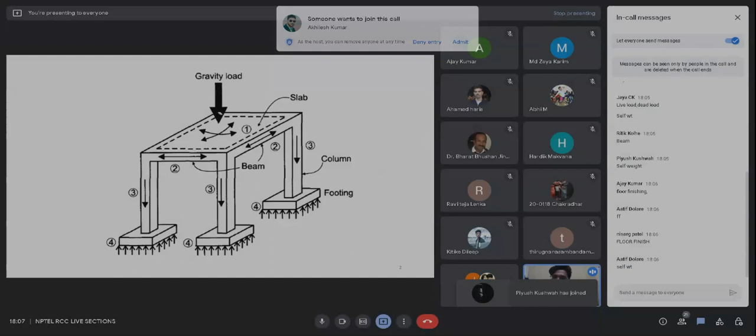The purpose of showing you this diagram is to clear your very basic concept in RCC, that is the slab. What is the first component of a reinforced concrete building that we are supposed to design? The very first component is the slab. After the slab we design the beam, after beam the column, and after column the foundation. I think this is very clear for you now.

So coming to the slab, you all have already answered me that the slab can have two types of loads, dead load and live load. Inside that dead load and live load we can have further classification, which we will see in further slides. Now let's focus on the slab only.

Can you guys answer me in what manner a slab can be designed, for what type of forces or what type of stress resultants the slab is designed? What type of forces are predominant in a slab? Can I get some answers?

Okay, now you. Who was speaking? Vinodha? Sorry, I didn't hear you. Okay, what are you saying? I have just asked a question. Are you replying to that question, or just replying your name? Yes sir, I will give the answer. The answer is live load, dead load. Okay, that's fine, that's fine. So you are saying dead load and live load are acting on it, but I think you all are not very familiar, so it is now my job to make you familiar with this. Thank you for your reply, Vinodha.

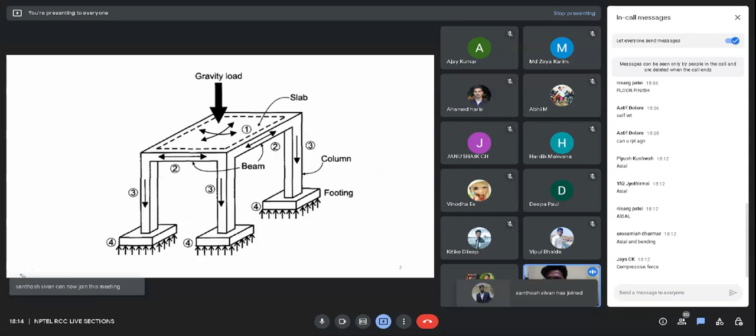So now moving on to our main problem, let's look at it. I have brought a very good problem for you guys. So this is our problem, I hope you all can see it. Don't get scared with this problem, it is a very easy problem, and you can all solve it with your basic knowledge from engineering mechanics.

You only need to convert some line loads into a point load, or some triangular load into a point load. I already told you there are two types of slab, but you are not very familiar with the types of slabs and what type of load distribution we use for different types of slab. So I have already given you the load distribution from the slab, explaining in detail how load from a slab gets transferred into the beams, and from beams into the columns. These problems deal with that explanation only.

Since this is the very first class, I am not using many design terminologies, and I am not using many codal provisions, because at this stage you will all get confused with all those. So I am just solving this problem from a basic mechanics point of view. Now let me read this question for you.

The slab shown in the figure has a thickness of 150 mm, and in addition to its own weight, it supports 0.85 kilonewton per meter square of partition load, and a live load of 2.4 kilonewton is also acting upon it. Transfer the load of the slab to the beam on all four sides in the form of line load. Unit weight of concrete is given, and we are asked to assume the ultimate distributed load on the slab in this manner. Then they are asking us to calculate the maximum bending moment on the beam and the axial loads on the columns. I think this is a very simple problem.

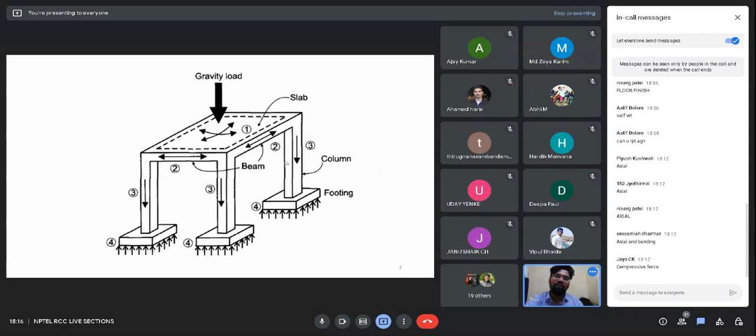Now different types of dead load and live load are given on this frame. They are asking us to transfer this load onto the beam, and then calculate the maximum bending moment on the beam, and find the axial force onto this column. See how many concepts we are getting cleared from this problem. Now we know that firstly we need to transfer the load from the slab to the beam, then from beam to the column, and then finally to the foundation.

Now I want you all to think of how the different types of loads are acting on this slab. I have already given you the load distribution. Let me explain how this load distribution is acting.

Firstly, this is the slab. This is a rectangular slab of 6 by 4 meter, and these are all the beams at the periphery. This is a 6 meter beam, this is a 6 meter beam, this is a 4 meter beam, and this is a 4 meter beam. So we have four beams.

So we need to calculate the maximum bending moment on these four beams based upon the load which is acting on this slab. So I think by now you are getting familiar with what we are trying to solve in this problem. So we are also given some areal loads.

So these loads are with a unit of kilonewton per meter square. Kilonewton is the unit of force, and they are distributed into the area of this slab. So what all types of load do we have? We have a dead load of 0.85 kilonewton per meter square. We have a live load of 2.4 kilonewton per meter square.

Can any one of you tell me, apart from these two loads 0.85 and 2.4, what is the other load which is acting on this slab by reading this question? The question says the slab is of thickness 150 mm,

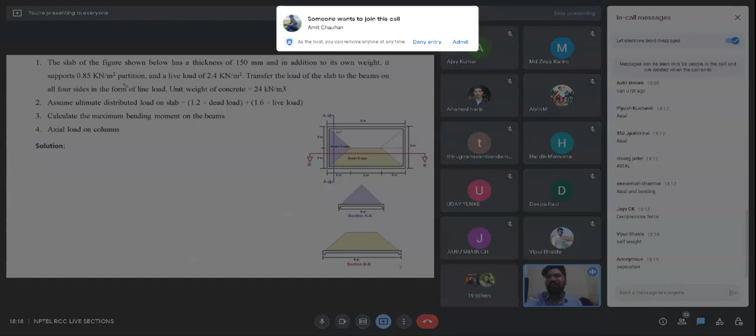Separation, okay. What is this separation made of? Separation means what? Okay, I'm getting what you are trying to say. You are saying, okay, Vipul is saying brick wall. Okay, Sharon is also saying brick wall.

That is very good. So partitions - we have a partition wall in between two rooms. Nowadays we have different types of partition blocks, AAC blocks like autoclaved aerated concrete, or we have fly ash bricks. We have different types of material. So we have this dead load due to this partition, and the live load is coming because of people living in this building or structure.

So apart from these two loads, can anyone think of some other dead load which is acting on this frame or on this slab? Sir, excuse me sir, where is the location of partition involved, sir?

Actually the partition wall, they are basically located upon these slabs, like upon this beam. Okay, this is a very good question. He is saying, where is this partition load acting? Actually, this partition load is basically acting upon these beams. We basically make partition - we make the brick wall upon these beams.

But now in this question, they are not giving us the partition load in the form of a line load. They are giving it in the form of an areal load. So what they are actually trying to say is that this partition load is distributed uniformly upon this slab. Did you get me?

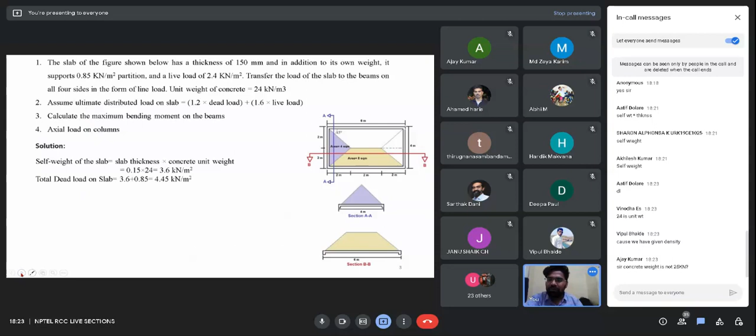So now we have the self weight of the slab as well, and we have the total dead load. We can calculate the ultimate distributed load on the slab. So total dead weight has been calculated, and now we have the ultimate distributed load in this form, which I have already calculated for you. You guys will be getting these notes as well as the recorded video on YouTube.

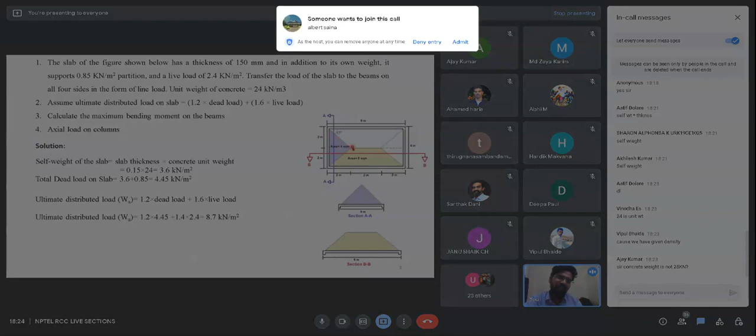Now what is asked in this question is to transfer the load of the slab to the beam. I have already given you the type of distribution. You can see this is the triangular distribution for this beam, this is the trapezoidal distribution for this longitudinal beam, and this is the shorter beam. So can anyone of you tell me how to calculate the total load acting on this beam, or how to transfer this load onto this beam?

Can anyone of you answer me? Believe me, this is going to clear a lot of your concepts. Yes sir, isn't the triangular load formula 1 by 3 WU into L? 1 by 2 WU into L? 1 by 3, 1 by 3.

Okay, very good. Who was this? Shivam, okay so Shivam, you gave a very correct answer. But before going to this formula, that was actually our final answer that I was going to derive and explain to you, but this is very good, you already know this. Can you explain how did you come up with this expression? Why didn't you directly multiply this 8.7 into this triangular area and get the total load?

Sir, actually I had checked in the book. It was given that it was at the center of the triangle, there the load is 1 by 3 WU into L. I think it's the centroid, something related to centroid. Okay, you have checked it in the book, so your answer is very correct.

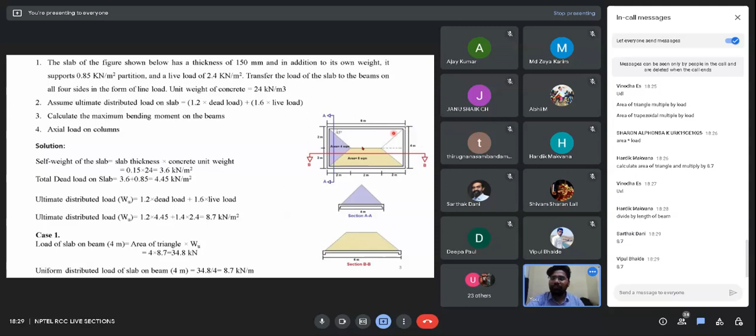On this longer beam, 8 multiplied by 8.7... 69.6. How did you get it? Okay, very good.

Okay, fine. Some of you are getting a different answer, 52.2. I don't know how you got that. So these are the two answers we have. Okay, I think you are saying 11.6 is the UDL. Okay, fine, I get you.

So now we have the line load for both of these beams, and we are proceeding to the design of beams also. We have already calculated the area load on the slab, so we can design the slab now. How to design the slab, we will look into in further sessions of this course.

But for the time being, let's first see how we transfer the load from the slab to the beam. So we have transferred the UDL onto the beam.

Now I think it is very easy to calculate the maximum bending moment from this uniformly distributed load. We have 11.6 kilonewton per meter UDL on this beam, and here also we have a uniform load. Just assume these as simply supported beams, and you all can calculate the maximum bending moment.

Can you all do it? Just reply with yes in the chat box if you can calculate the maximum bending moment with UDL onto these two beams.

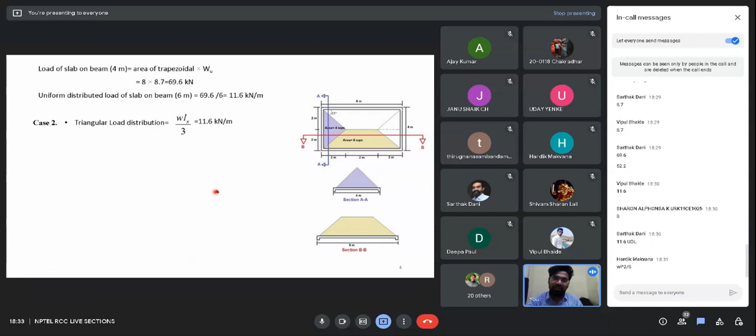This is less as compared to this 11.6. So 11.6 is a more conservative design. Why we are using this formula, I will be explaining you.

First, let's also look at the other one. For the longer beam, we have a somewhat tedious formula, which you can remember or not remember, but you can definitely derive it after I make you understand, where K stands for Ly by Lx. When I substitute the value and calculate the line load onto this longer beam, I am getting a value of 14.88. So this is also higher as compared to 11.6.

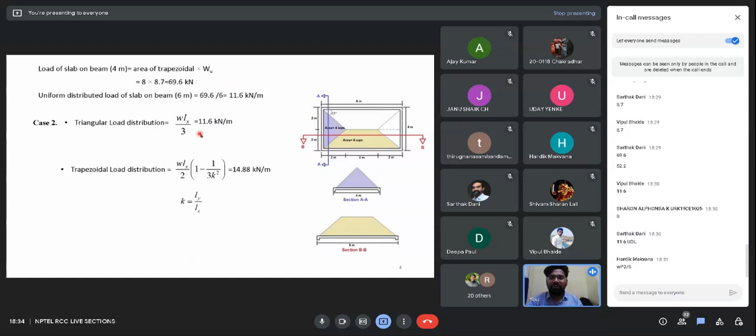So sorry, I said previously that your building will go nowhere if you go by this design, but I think the building will go somewhere, or that will be a not very conservative design. So what do I mean by conservative is you are not taking the maximum load for the design of the structure. So now the question is, why am I using these differently looking formulas?

We want to average out the load on the beam. You want the average of the load on the beam. Okay, that's a fine answer. You are going close to the actual answer. Can anyone else think of a better answer?

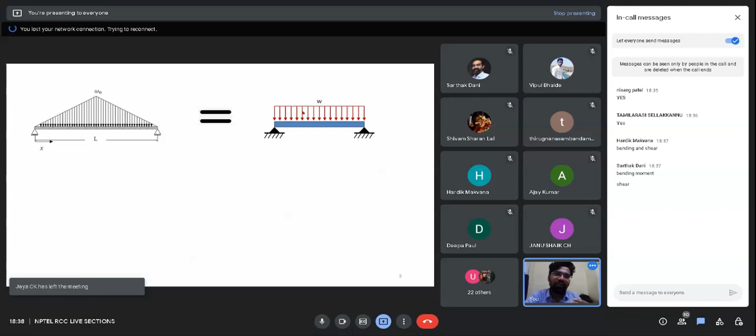Okay, so what we are trying to convert is this triangular areal load into this UDL load. Let's take this first case in which we are converting this triangular areal load into this UDL load. We are interested in finding the maximum bending moment for the beam at the center. So at the center, we will be equating the maximum bending moment at the center of this beam to the maximum bending moment at the center of this beam.

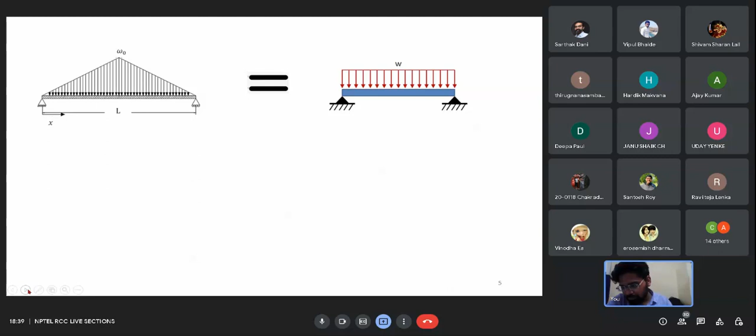So what we will be doing is equating the bending moment of these areal loads. Just remember these are areal loads because a slab always gives areal load, not line load. So this is W0 per meter square, and this is W per meter square. We are converting this triangular areal load into a UDL areal load, or rectangular areal load, whatever you can say.

So can anyone of you tell me what will be the maximum bending moment here? I think it will take some time. Can you just tell me what is the maximum moment for this UDL case, the normal UDL case?

Normal UDL case, that is easy. For a simply supported UDL. Actually, this should be a roller, wrong diagrammatic representation.

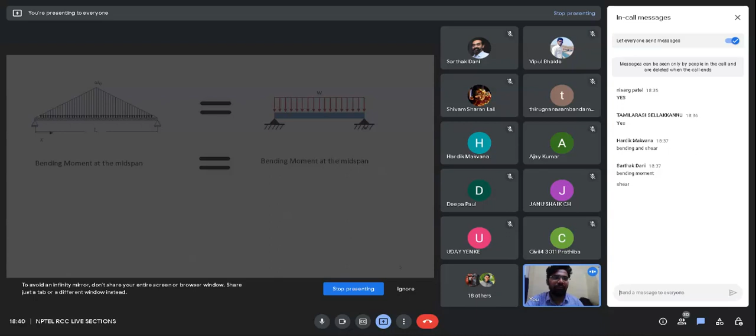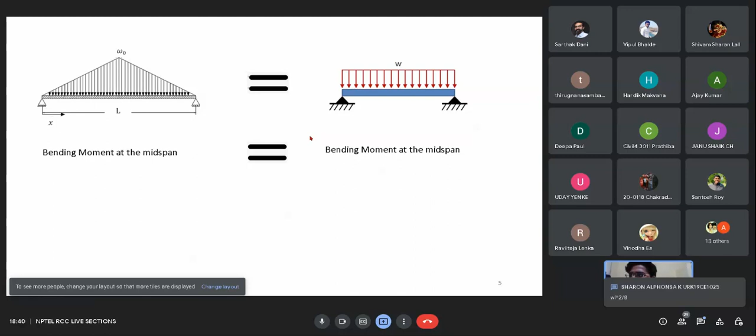Hello? Can you tell me the maximum bending moment? So WL square by 12. Okay, that's not correct. WL square by 8 or 12. Sharon is saying 8, Vipul is also saying 8. Okay, so we know the maximum bending moment for this.

We also know the maximum bending moment. You can calculate it very easily. So let me display the answer for you. So the maximum bending moment for this case is this, and for this case. So what we are interested in finding is this W.

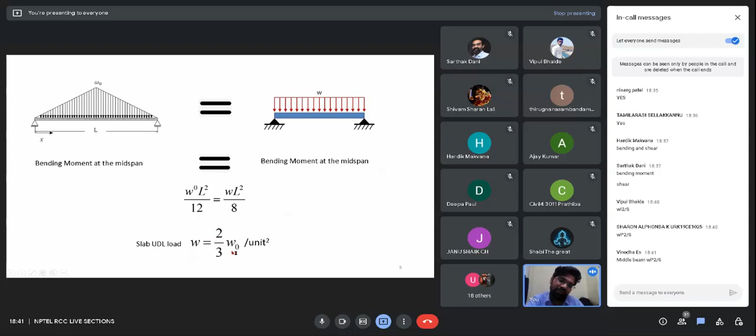We are interested in finding this because we are converting this triangular aerial load into a rectangular aerial load. So we want this W, the uniformly distributed load on the beam. We can get this W just by cross multiplying. We get this W as 2 by 3 W0 per unit square. This is in unit square.

So now what can I conclude? I have converted this triangular load into a UDL load. So now this UDL load or this rectangular load,

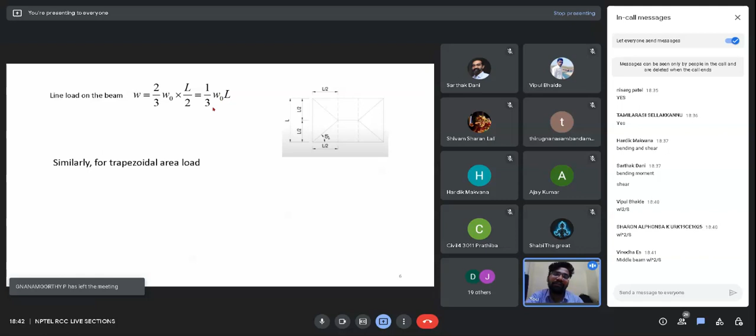it can be converted from kilonewton per meter square to kilonewton per meter just by simply multiplying it by L by 2. So I have done that for you. So finally, after multiplying that per unit square with L by 2, I get this W0 L by 3. So that's what we have used in the previous slide, if you remember. For triangular we are using this WLX by 3. So this is the way we are getting this triangular distribution on this beam.

So see, this is very important in designing. In design we have to look at the various maximum forces that we can get by converting the different aerial loads to line loads. We cannot just directly multiply it by the area like a normal person and calculate it. We should first focus on in what manner we can get the maximum force onto these beams, and then design for that maximum force.

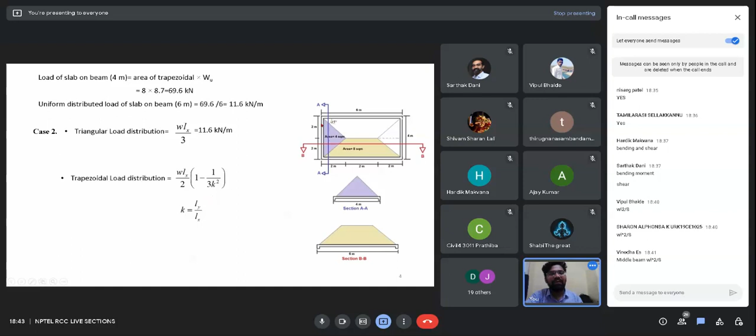So we have seen that when we equated the maximum bending moments of two aerial loads from a triangular to a UDL, we got WLX by 3. And for trapezoidal also we can get this. We can simply do the procedure, calculate the maximum bending moment for this type of load, and equate it again with WL square by 8. Okay, so this was what I am trying to convey to you.

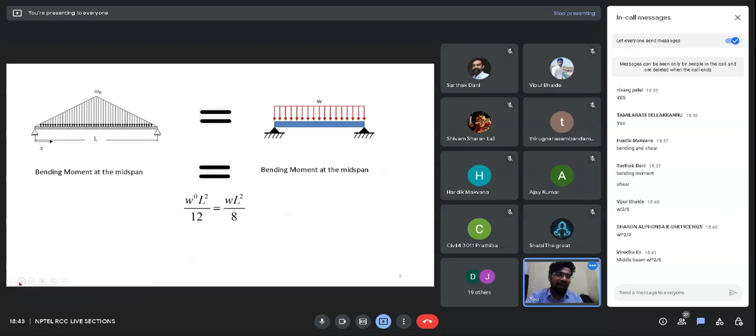So I think this should have cleared some of your concepts. We cannot directly calculate the load like we do in engineering mechanics. Now we have to follow some codal provisions in the reinforced concrete structure subject, and with the help of these codal provisions we will be able to design our structure in a very beneficial and economical manner.

So now I want you guys to find or derive the formula. The formula I have already given you for the trapezoidal load converted to UDL, in slide number 3. Now I want you to revise the similar steps and derive it yourself. You can do it as a homework problem if you wish. My only motto was to clear this concept in the very first lecture of this reinforcement session.

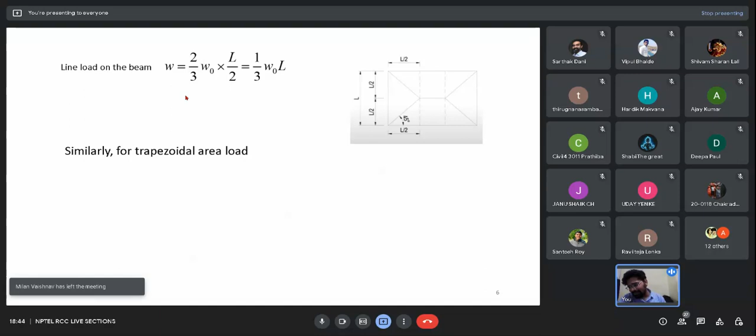You must have also noticed we have some other questions, like calculate the maximum bending moment on the beams. That you can do easily, now that you have the line load on the beam. The fourth one is calculate the axial load on the column. That also you can do. You just have to find the support reactions of these beams, which would be nothing but the axial force acting on that column.

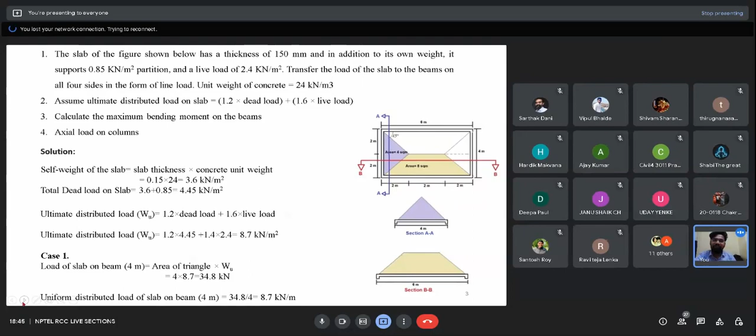Sir, where did you get these derivations? I was searching for them for a long time in the book, but it was not given. Which book have you followed? I have not followed any book. Even I have learned it from my professors, they explained it to me.

Shivam, what you can do is just type it on Google: explanatory form of IS 456 2000. You will get various explanations for these various formulas.

Thank you sir, for helping, because there are various things that are not given in the book. The IS code comes with ready-made material for you, you can use it directly to design your structure using the codal provisions. These provisions are designed by years of research and are kept updated from time to time. If you want the explanation, you can refer to the explanatory notes, which you can get easily online.

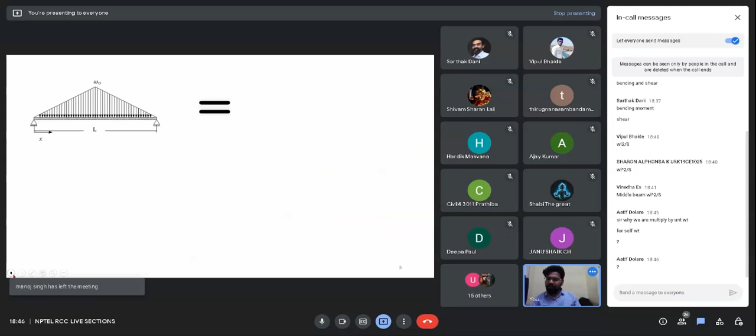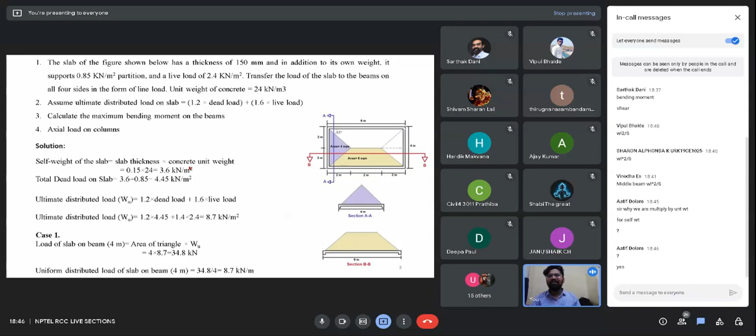Sir, why are we multiplying by unit weight? On which step are you asking? Okay, by unit weight here for the slab weight, you are saying, Atif. Why unit weight, what is unit weight? Unit weight is nothing but the density of concrete. For plain concrete, it is 24.

I understand, Shivam. You can either follow the various dead loads which are given ready-made in IS 875 Part 1, where we have all the dead loads for various construction materials. But for this problem, it is given that we need to assume 24 — this is just a problem, so don't take it too hard and fast. So Atif, what I was saying is the unit weight of concrete we are taking as 24. It is basically like density, and from density we can calculate the mass, since density equals mass upon volume.

But now we are trying to calculate the difference between limit state and working stress method. Yes, the recording will be available — the NPTEL team would be sharing it with you.

Ajay is asking me what is the difference between the limit state method and working stress method. If you see the week 2 content, it will be clear for you from there. But to give you an idea: working stress method is basically based upon the stresses, and we calculate it from the maximum forces acting on the structure. Whereas in limit state method, we deal with deflection — based upon the deflection criteria we design the structure in limit state method, and based upon the stress criteria we design it in working stress method.

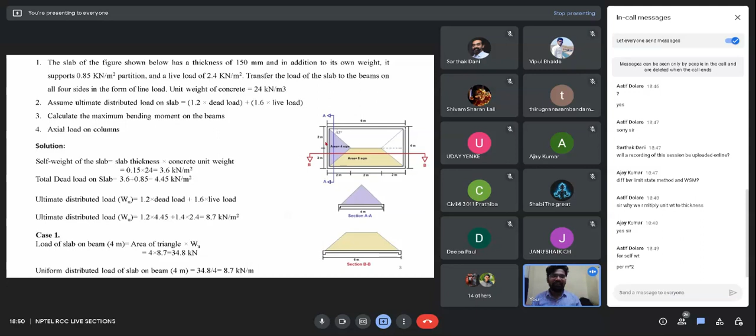Yeah, we are multiplying it to convert it into meter square, because all of this load is given for this area, the 8 into 4 area. So we are eliminating the thickness length. How can we eliminate it? We can just multiply it by that thickness.

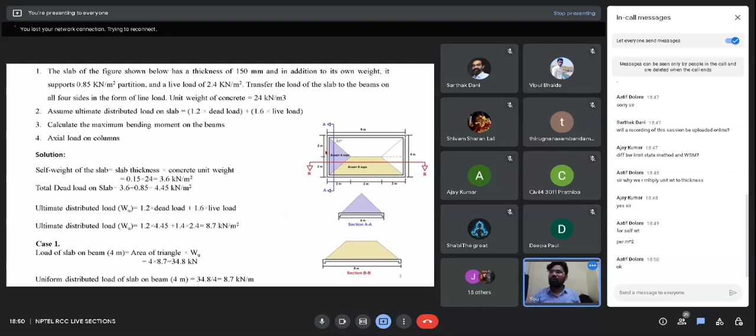Okay, fine. Any other question, sir? Sir, I have a question. Yes. Sir, in the book of RCC by B.C. Punmia, for calculating the trapezoidal load, the formula was WU into Lx, R upon 2 plus R, where R equals Ly by Lx.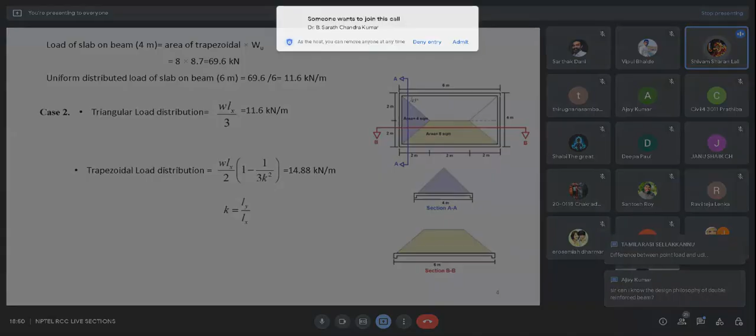Sir, it is different from the formula which you have given. Can you repeat that formula? W into Lx, R upon 2 plus R. W into Lx, R upon 2 plus R.

Okay, so that was actually given in the working stress method, yes, and it was used in the limit state method as well in the book. Okay, I get you. So basically we can have different formulas for this load distribution based upon different codal provisions. I can get back to you with the explanation of that formula in the next lecture if you want. But for the time being, let the trapezoidal formula be assumed as this only.

If you calculate, let me know what difference in values you get by using that formula and this formula in the next class. I had applied different formulas, and just like 4 to 5 kilonewtons value is changing, sir.

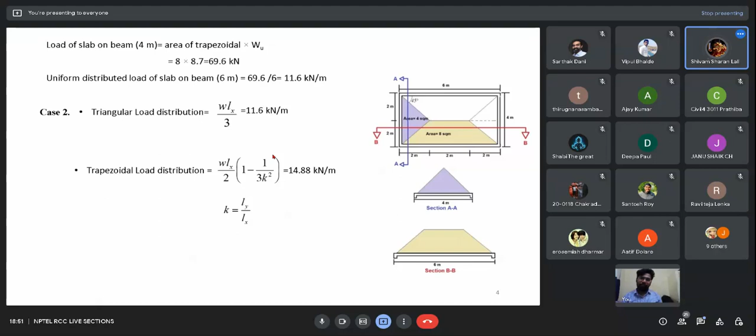Okay, so for this, which formula have you used? Yes, in one of the videos I was getting something like this formula. From that, my answer was 15, and in the YouTube video in which this kind of formula was given, it was 19. So I thought they were similar, so I used the value from the book itself.

Okay, so the explanation I have for this formula is we are calculating it based upon the maximum bending moment criteria, and the one you are saying, 1 plus R, I think that formula is coming from this derivation. If you wish, just try deriving the formula for case one, 2 plus R, if you get that formula again.

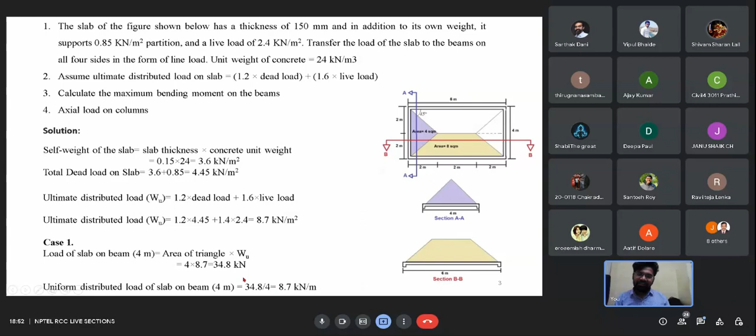Sir, I am not getting what you are trying to say. I am saying just derive that formula. Like for case one, don't take these variables. Okay, I have taken these variables now. Just don't take them. The case 1 formula was same, but the case 2 formula for the trapezoidal load was different. Yeah, I got you.

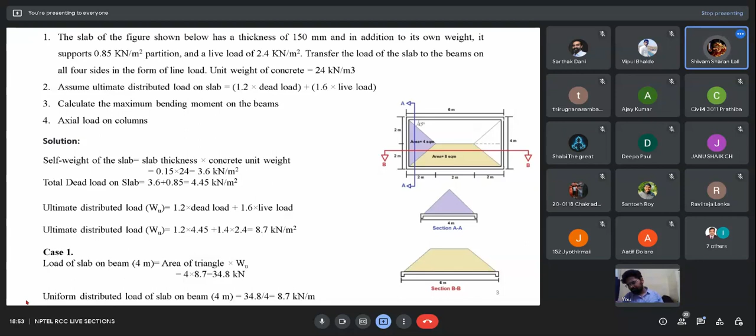I think that is just some different presentation of that formula. And sir, the shear force on the span, it means it is safe. Since slabs are safe for shear force, I thought there wasn't a major difference.

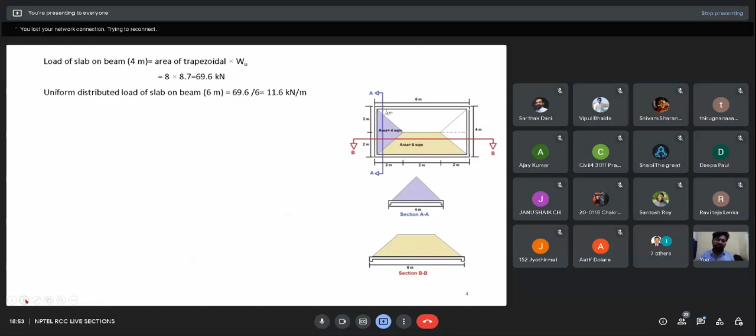Okay, okay. So Shivam, I will have to look at that formula. Also, some people are conservative and they use 0.5 WU into the average of the lengths Lx and Ly. Yeah, that's what I said, there are different ways you can use this. Conservative means if you are getting a higher value than this, you can definitely go for it and design, but that would be uneconomical.

Yes sir. Yeah, so let me also look at that Punmia formula, and I will figure out what you are talking about. Okay Shivam, I will get back to you in the next lecture.

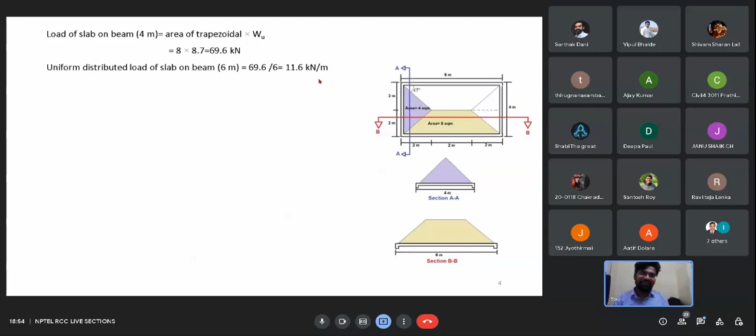Okay, thank you sir. Sir, will you be there in the next lecture? Yeah, if you join my session, I will be there, on this day only, 6 to 7. Okay sir, there are different lectures, on Saturday there's someone else. Yeah, I know, but that depends on you, whose lecture you want to attend, it's like that.

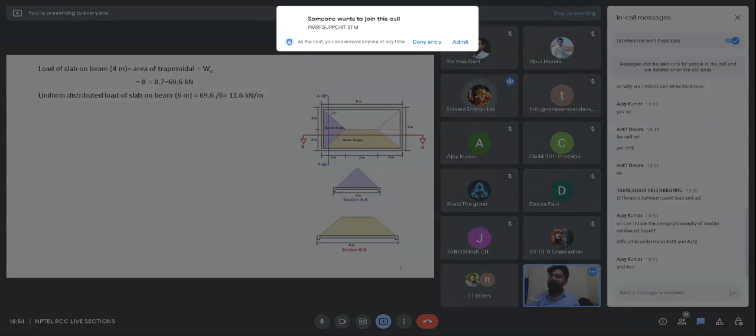Okay sir, thank you for this. Sir, I want to ask one more question. Yes. It is related to T-beams. Can I ask? Yes, you can. Sir, in T-beams there is transverse reinforcement. Okay.

In the slabs there are top reinforcements. So can the top reinforcement act as the transverse reinforcement in T-beams? Yes, because during monolithic construction, we do that only.

In one-way slab, when the span of the T-beam is parallel to the longer span, we are not providing top reinforcement in the slab. In that case we have to provide top reinforcement. For your practicing purpose, we deal with singly reinforced and doubly reinforced beams, but practically we always go for doubly reinforced beam, with reinforcement both in compression and tension side. But they are considered as T-beam in the design, because we always have a monolithic construction of beam with slab.

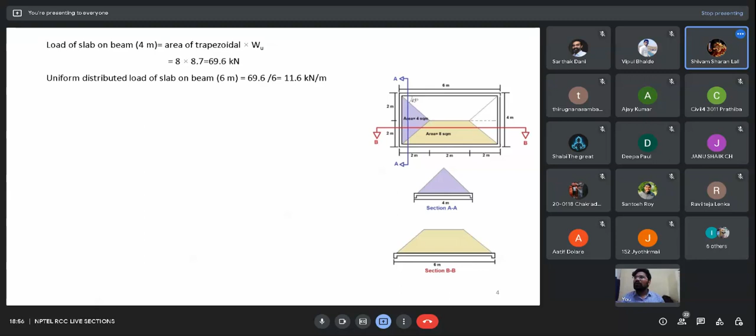Okay, okay, thank you sir. So we have some other questions.

What is the difference between a point load and a UDL load? This is a very basic question. A UDL load is uniformly distributed. We never have a point load physically or in a real time scenario, we always have a UDL load. But just for simplification or for building mathematical models, we convert that UDL load into a point load so that it is easy to do numerical calculations for the design of our structures. These are all assumptions we make. Practically, it is not possible to have a point load.

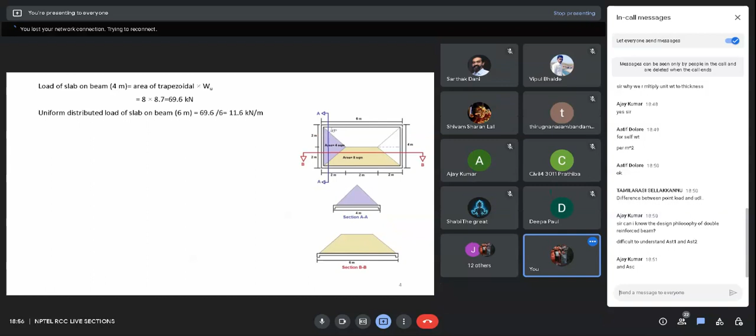Can I know the design philosophy of doubly reinforced beam? It is difficult to understand AST1, AST2 and ASC. I'm not very sure if the designing of beam has started in the week 2 content. If you follow the week 2 content, you would get familiar with the various design philosophies. I would recommend you see those lectures carefully and then come back to me if you have any doubt. Was that clear, Ajay Kumar?

Okay, you saw it. So what are you not able to understand? AST1 and AST2. AST1 is the tensile steel which is embedded inside the beam for taking the tensile forces, whereas AST2 and ASC is the compression force at the top of the beam. AST1 is the tensile steel at the bottom of the beam, and to balance that AST1 tensile force, we have compression of concrete. Now we have AST2 at the bottom, and to balance this AST2 tensile force, we have ASC steel at the top of the concrete. Do you see how it is working? Tension, compression. AST1 is balanced by compression of concrete. AST2 is balanced by the compression steel ASC.